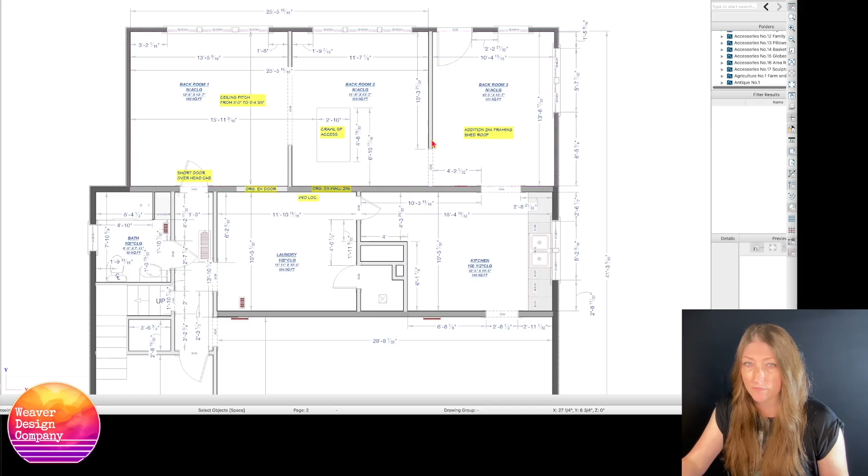But anyway, one thing I wanted to point out to you guys is this here is the original exterior wall. So this was a 2x6 exterior wall. You can tell that there used to be a door here, and you'll see that in the photos in a second. And then this section they added onto the back of it, and it's a shed roof basically. So none of these here are load bearing, so there's some walls that disappeared that you'll see in the photos.

So I kind of just wanted to show you here. This was a second story bathroom, which it was, I don't know how anybody was able to use this. You'll see that in a second with the before photo. If you're any sort of tall person, you would not be able to use this toilet at all. So this was a complete afterthought here.

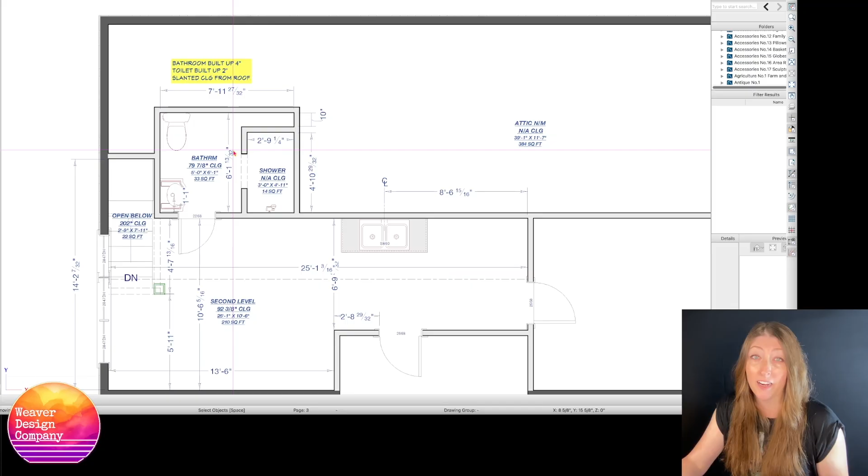This is just demo framing overlay. That's framing there. So here's what we decided on for the actual kitchen layout, bathroom layout, rearranging it. So you may want to go back and look at the original here. So what we decided to do was open this up here, make this a dining room, and add a huge pantry for storage. So there's not a lot of closets in this house, but this right here will help a lot. So then we decided to make this the kitchen.

So the wall that you saw earlier that was here is gone, and we framed in a laundry room here. We originally had these on the exterior wall, but we found out they passed a code that says they don't want any kind of plumbing on an exterior wall. So we may have to do something with the sink. We don't know. And then over here, we did turn this into the primary master bedroom.

And then we turned the laundry room into the primary master bathroom, so gave them a walk-in shower. There's a pedestal tub here, so it sits on top of the floor. And then we've got a water closet and double vanity.

And so if we come over here, we remodeled this little half bath, or it's not really a half bath, I guess it's the main bath, but we rearranged it so it made more sense, so that we could have an in-swing door instead of an out-swing door. So we've got a shower in the corner, same plumbing location as before, but we just moved the vanity faucet over here.

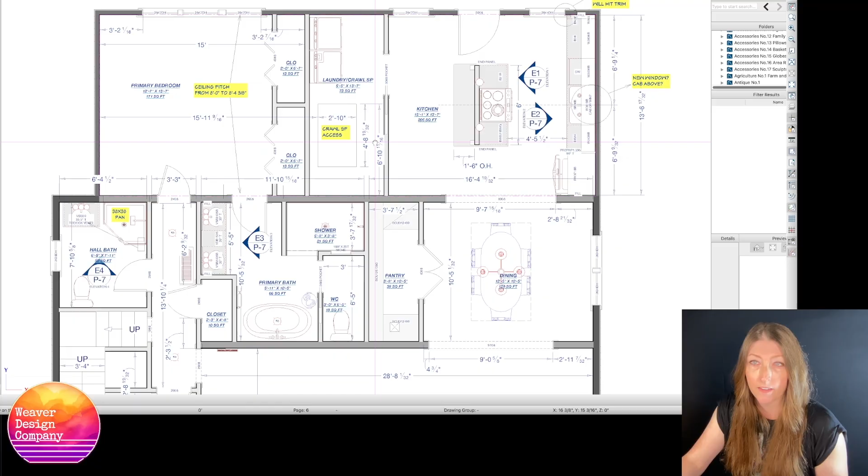So that is what we came up with for the remodel.

And then this would be the new bathroom upstairs portion. So you can see here, they actually ended up widening the stairs, which is great. I think that needed to happen.

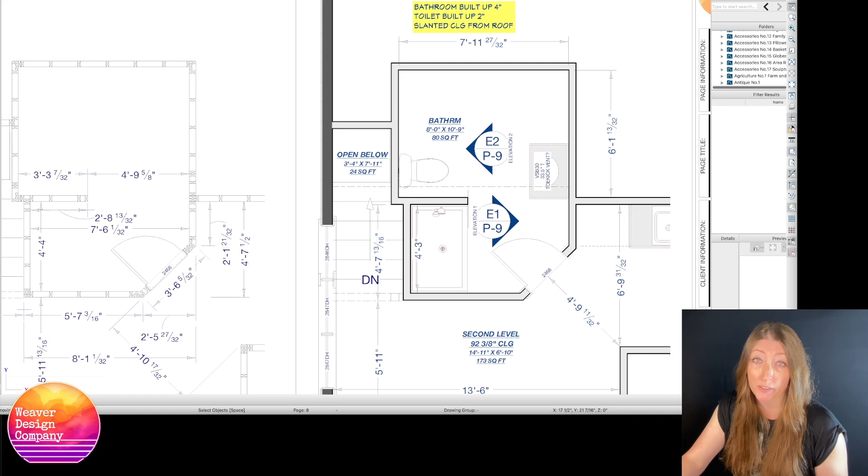You can tell they probably smoked a lot in this house. There's a lot of yellowing on the ceiling, yellowing on the trim, just kind of in general.

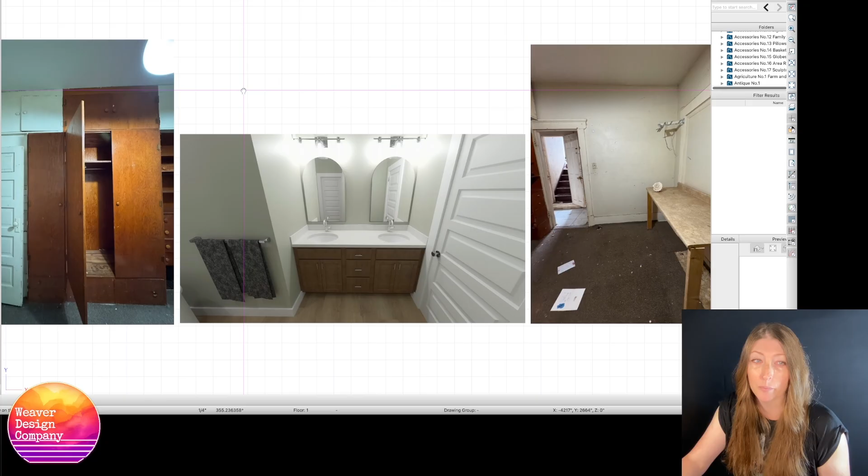And you can see the tiny little stairs right there. They're so small. I don't know how that would have passed for a duplex, but it, I guess, did.

So this photo here is the laundry room opposite the original exterior door location, facing what would be the living room. And so we have a tub going there right now. But the doors are really cute.

And in some of these houses, you know, we try to save what we can, but sometimes it's in such disrepair that it's just not gonna work.

And so here's more laundry room, original laundry room. So this was the door to the original kitchen, and now there's going to be a shower there, or there is, it's already framed, so it's there. That's the original exterior door, which is what this is now.

So yeah, this house seemed to have a lot of neglect, and we're not really sure why. It just did, and the attic was just full of stuff.

So same laundry room, kind of the same viewpoint. Double vanities go here with the door moving right about here. So it's going to be a big difference.

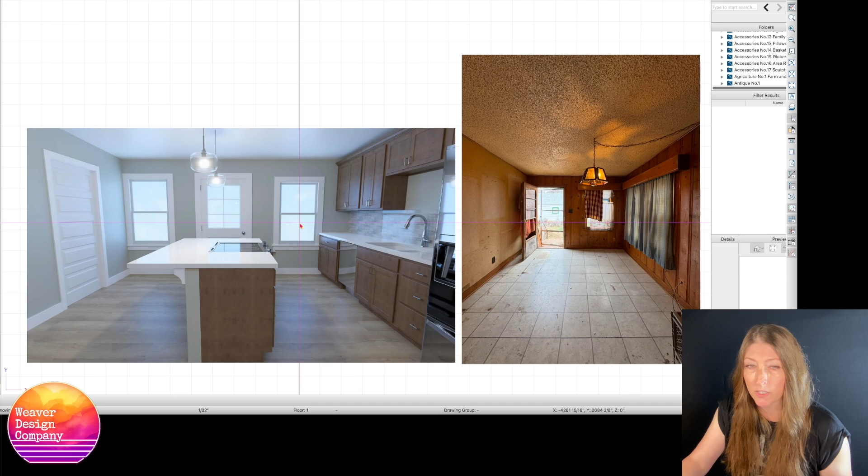But I don't know if they'll keep this window or not. We've got a filler right here on the cabinet, so it's going to hit the trim because it's so wide. But other than that, all of this stuff is gone. It's just, sometimes it's better to just start over.

Here's another view, looking in towards the original kitchen into the front door, the living room area. So this is kind of the same viewpoint, just turned a little bit. But you can see how much it was opened up and how much room the kitchen's going to have. So they had to move this electrical panel also.

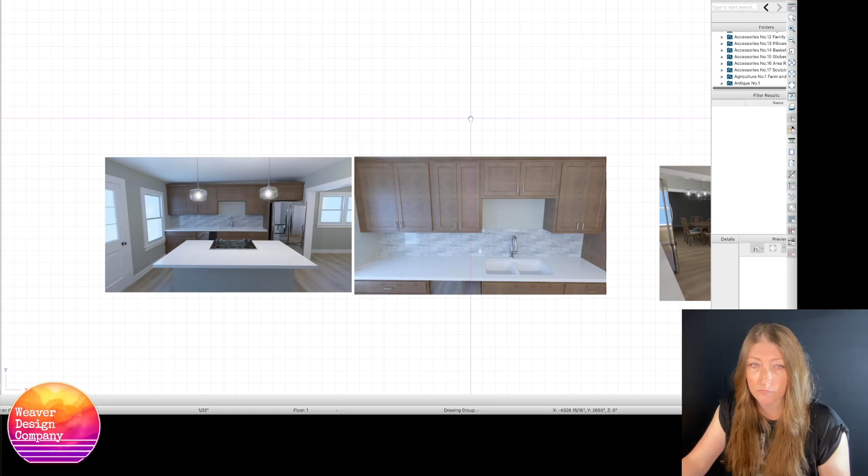And so these are my kitchen renderings. You can see here how the ceiling pitches, so we just chose to do the cabinet straight across. And then I rendered the selections that were chosen for this here.

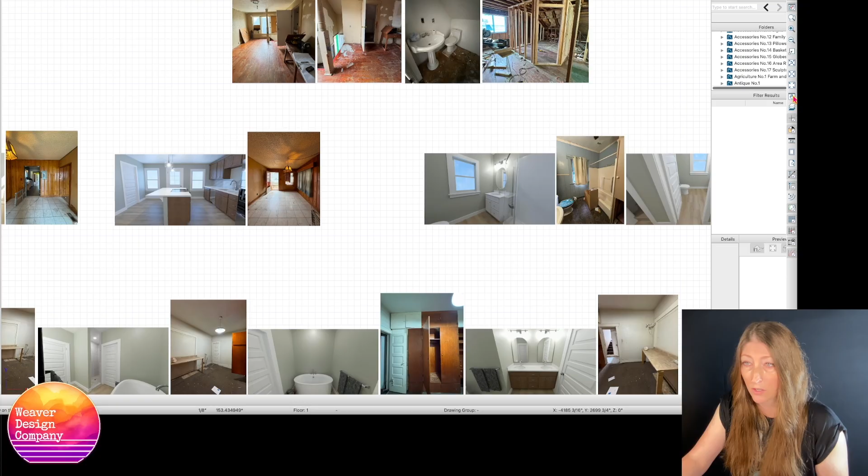So then if we go and look at the hall bath, main level. This is the little bathroom where the door actually swung out into the hallway, and this is why, because they had a sink here. So it's just kind of a weird layout, but we fixed that, and the door's gonna swing in now.

So I think that'll be a better solution. Here's just another view of that. There's actually another bedroom on the main level too, towards the front of the house. So I think by the end of this, it'll be, let's see, 1, 2, at least 4 bedrooms, and 2.5 bath, or 3 bath actually.

So this was the before. I think that'll be a huge difference, more functional that way. And then I wanted to show you the upstairs bathroom, what it looked like before.

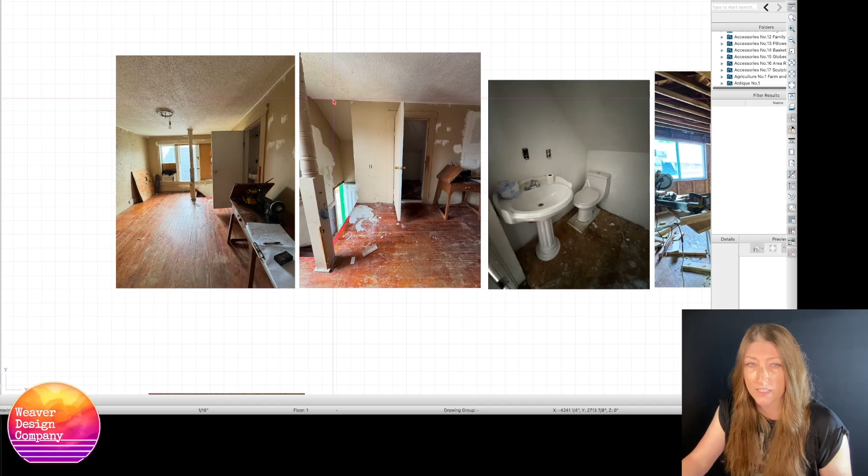So this was the upstairs bathroom. This is the stairs going down, the little tiny stairs, facing the stairs that go down. So this bathroom was framed into the attic portion, and right here is what I was talking about. If you're a tall person, you're not going to be able to really use this bathroom at all. There's just no room. And on the opposite side, they framed in a sort of shower.

I don't think I could even fit in there. It was so small, but that's what we mean by we don't know how this would have passed as a duplex at all.

I thought here's this, going down the stairs, they had this door to the outside, which this door is not a normal size door either. It's very small. So here again, I don't know how any of this would have made it into being a duplex. So we do have a framing photo.

Upstairs for this, so they widened the stairs here, which needed to happen. And then this bathroom is actually, if you'll notice here, built up probably to accommodate the plumbing because it was never meant to be there. So they were able to level that, which was awesome, and then just frame it actually bigger than what I had. So that's great.